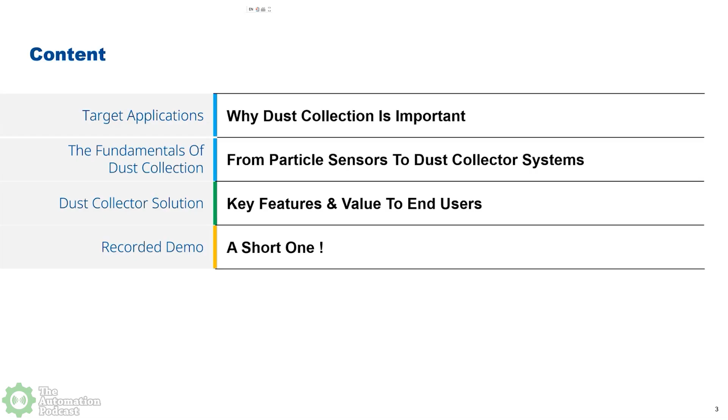And hopefully we'll have time as well to have a short recorded demo that brings us the full scope of how the operators look into that solution when they use it.

In terms of key applications, industries, use cases, dust collectors are essential for many industries that produce dust, produce any kind of powder, any kind of fume, and typically air pollution control, powder processing, handling, industrial dust and fume ventilation are covered one way or another by dust collectors.

And the industries that I put in bold, these are the dirty ones in the sense that they produce a lot of particles, either in terms of gases or dust. Therefore, the regulations in these industries are quite strong. So cement, metals, chemical, plastic, carbon black and toner, lead battery assembly, disassembly, metal foundry.

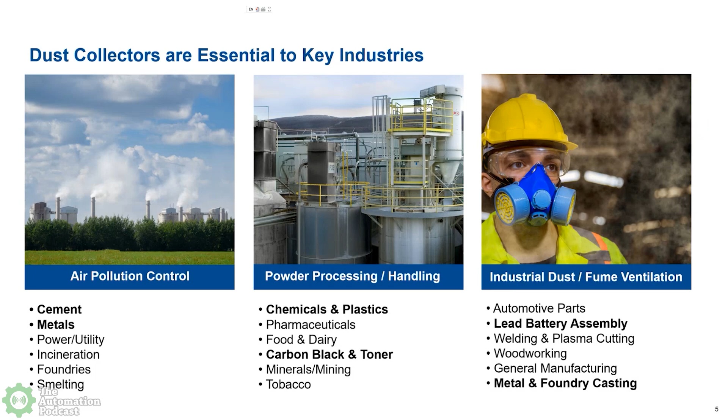And what is interesting is either you produce a waste that you have to manage properly, or it can also be recycled, for example, in industries like plastics, food or wood. All the collected dust that you have, you can also reuse and sometimes recycle.

But why? Why is this important? Why is it important to extract dust from these industries? Let's start on the right side, because this is what the customer is looking for. Because the costs of pollution, the hazards, the safety accidents that can be caused by these kinds of harmful airborne particles and fumes are so substantial, then of course it is very much regulated in all these industries.

And if you calculate the costs on public health, sometimes big accidents in plants, even big fires or hazards to people operating the plant, we talk about billions per year, the cost of that.

And one of the consequences of having such issues is when the dust extraction system is not working properly, or you really have a downtime. For example, I'm going to explain that this really depends on components that are used so often that they wear down, like filters, like pulse valves.

And each time that we have a downtime, it's not the cost of the dust collector downtime that's important, it's the overall downtime costs that it imposes on the operation of the plant, because in order to be conformant, they have to stop operating until they fix the issue. And these downtimes, of course, vary in many ways, in different aspects. How complex is this dust collector?

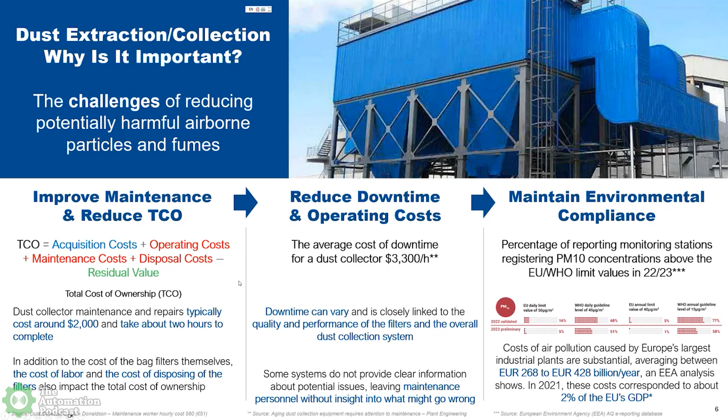And the reason for that is because the damage and the result of a big, let's say, issue on the plant regarding this dust part is quite heavy. So therefore, we talk about 100Ks or even more in some industries like primary metal and chemical, where one single incident is about 100K on average or more.

And then, of course, to avoid that and to be completely compliant, you have to operate those systems in many cases 24/7. And therefore, any way possible to reduce downtime, and as a plus, reduce the energy costs, because for compressed air you have to use electricity, then it pays off, because you're going to be full-time compliant.

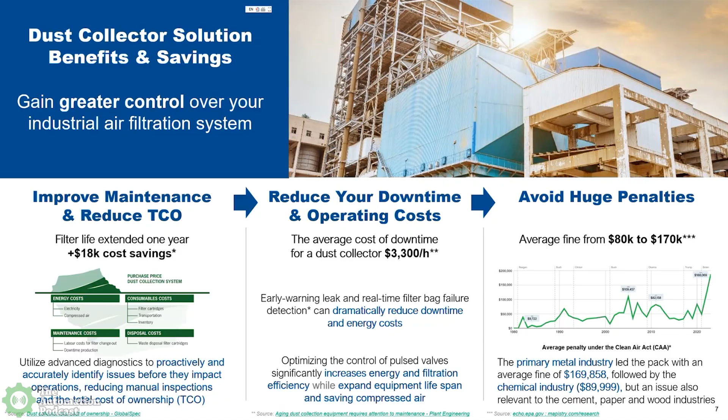You have the filter bags. You have to keep parts in your inventory. You have to dispose of that. And of course, you have the downtime costs and also the labor costs. Now I'm going to just give a chance to say, okay, tell me how a dust collector system works. And these are going to be general principles and basics.

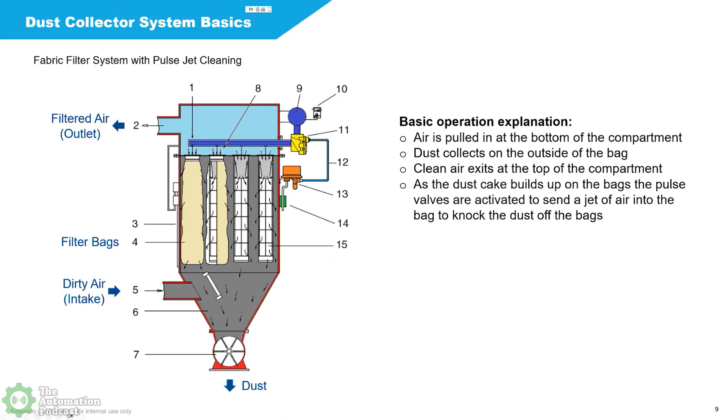And the pulse-jet cleaning is a way to unclog or to clean the filters in order to bring them to the more efficient operation. Especially if you have lots of dust, you need an automatic way to continue to clean it and get it off of the filter and into the bin. So yeah, that makes a lot of sense.

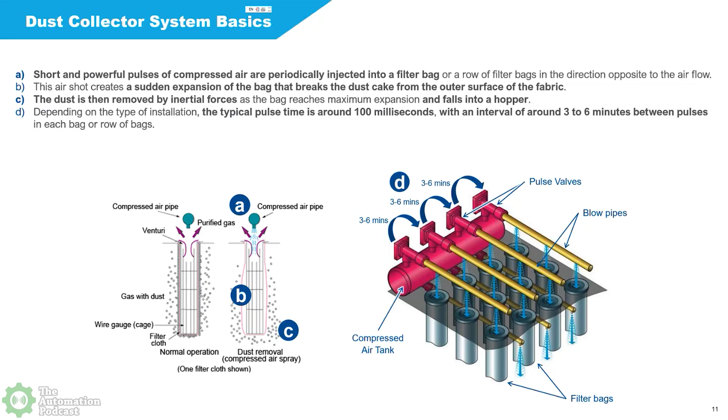In other cases, although you're talking about dust, of course, it could be any kind of powder. Like, for example, in the food and beverage industry, let's say dry milk production. You don't want that dust to be floating around because it can bring contamination. But believe it or not, it can ignite a fire sometimes. So that's why it's important to get that completely eliminated.

Basically, this sensor is coated with PTFE or a Teflon layer, so it's completely electrically isolated from the media. And then when the dust starts touching that probe, a DC charge is transferred. But because this sensor probe is completely isolated with a Teflon layer, the electric charge is in the order of a picoamp, so 10 to the minus 12. And the resolution is about 0.5 picoamp.

So therefore, if the particles are touching, depending on their size, they are going to generate more or less electricity that's going to be transferred. And the ones that are just around, not touching, for example, imagine that this air exhaust duct is quite big, half a meter, maximum 1 meter around that sensor, the particles also generate induced charge in AC. And by measuring that, we have an idea about how clean the air that's getting out is.

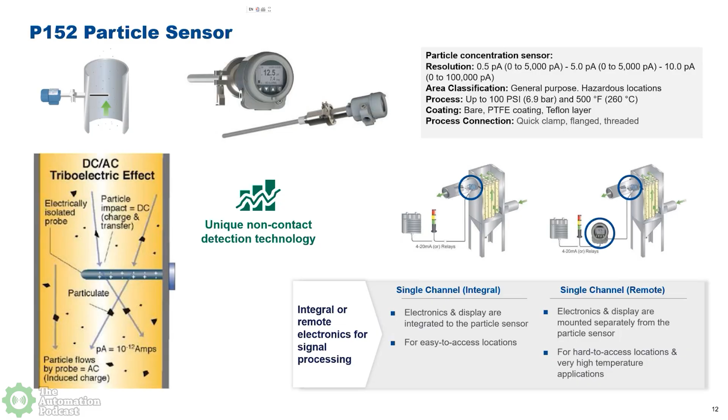They have in nature a little bit of noise, because imagine that every time that you clean, more dust gets inside of the filter bag. It's like when you clean your vacuum cleaner, immediately when you turn it on, some of this dust is gonna get inside, and that's the peak. But now imagine that you have a rupture in the filter, or you have a big hole, because unfortunately things wear out. And then this peak starts getting higher and higher.

So therefore, when we put that solution in place, for a little time, let's say a couple of days, we need to set up these thresholds. We need to figure out the level of noise, because it depends very much on the capacity and the types of dust. But once you do that, in our solution, we set the thresholds like a warning alarm,

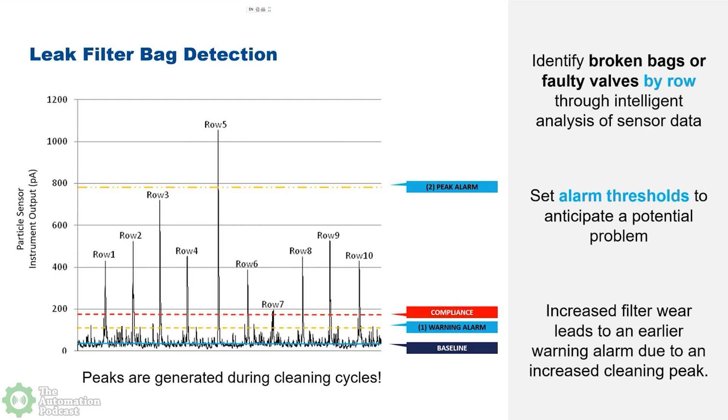And just to remember, with this particle sensor we simply use one unit on the outlet. That's why I needed to serialize the pulses, because I need to synchronize with the pulse jets of every row, row 1, 2, up to 10. And I think, too, if you tried to do them all at once, you would need a lot higher pressure. So it makes sense to do it row by row because it reduces your maximum pressure required. Yeah, with this particle sensor you would not be able to identify which of the rows had the issue. That's why we still have to do that.

But now let's give a solution overview. I think some of the key capabilities and features are going to highlight even more the other diagnostic capabilities that we are able to provide in order to identify such issues correctly and as early as possible. So this is a typical dust collector system.

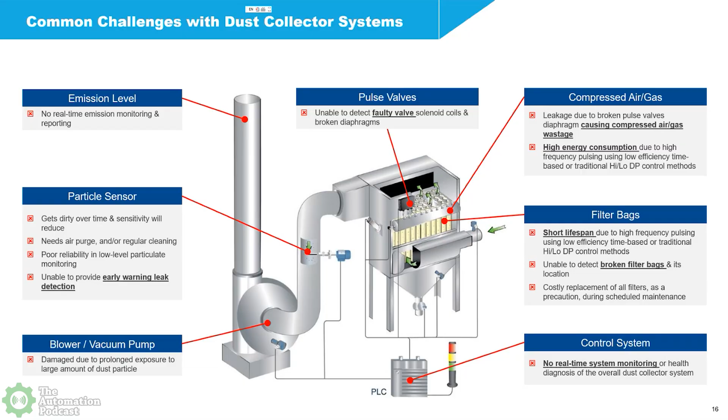The filter bags, independent of the materials, because if you talk about life sciences, food, chemical, or metal, they have different materials, they have a different wear-out lifetime span. The point is, the filter itself might not be so expensive, but going up there, exchanging, stopping, moving things around, getting the dust out before you change, putting on all the personal protection equipment may take hours. So that is the cost of that. And if you're not able to prevent or even have an early warning when that is going to occur, it's going to be a reactive maintenance issue, right? So that's why it's worth looking into different aspects.

And that's why on the left side, when we talk about solutions, we talk about the connectivity part, that we have to work with devices that are HART or 4 to 20 milliamps. Some of the devices are Modbus TCP, newer actuators and pulse valves could be MQTT or even OPC-UA. That's the PLC part that we have, and we can work with pneumatic systems, for example, with EtherNet/IP, PROFINET, or any other standard. Then, of course, we have the IOs that we have to look at to control the pulse-jet systems, but also to monitor the differential pressures, to measure the compressed air in some cases,

until the part where at the top we put an HMI SCADA software platform that we pre-engineered in order to make the development of that solution simpler for our OEMs, or in many cases directly for our end users. And all on the right are the elements that we offer in our portfolio. In some cases, OEMs of dust collector systems just take from us, and they might have their own solution as well.

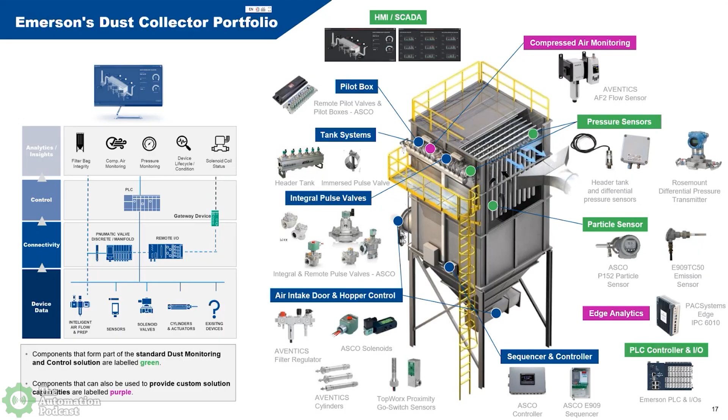No, thanks for highlighting. And I say that when I introduce myself, that I'm from the discrete automation part of Emerson, because most people would know Emerson by Rosemount, for example, pressure, Fisher valves, and the DeltaV DCS, right? Yeah, this is the discrete automation part, and that's why it's probably something new for everybody here.

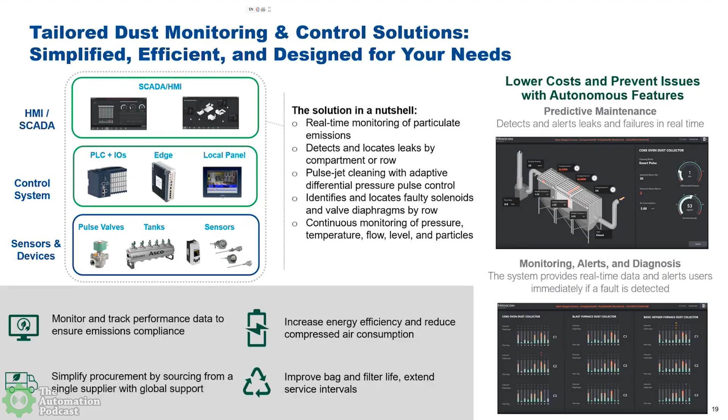And basically, when we install that solution, sometimes our customers ask us to also integrate with their control systems. So therefore, the compressed air generation, the fan, the hoppers, the safety alarms of the plant sometimes are fully integrated as well. Now let's talk about a few features because these are the ones that probably you haven't seen yet. I want to talk about our HMI control system.

It's based on the Movicon Next platform, and basically it provides everything that you know from the SCADA HMI, and that's why we use this in general for applications like OEE, energy management, and infrastructure monitoring like smart cities, wastewater facilities, solar mega plants, etc. Of course, it provides data visualization, but I like to highlight that we provide connectivity to all major PLCs that you can imagine with communication drivers. Of course, the open standards like OPC UA, like Modbus.

And on the lower part, the gray part here is what we used for that solution. Sometimes we use geomaps to indicate where the filters are. Some georeferences, let's say geofences as well. The people have to be with personal protection equipment to be there. So there is some real-time data that, of course, we are collecting for the particle emissions and other elements like differential pressure or header pressure. And then you have the headlines.

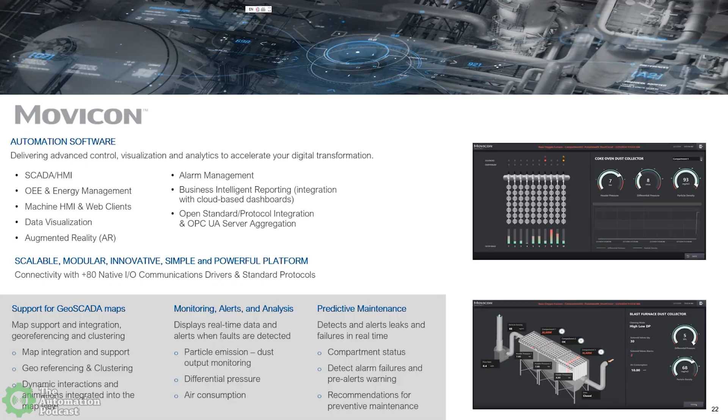You can see some screens that are completely dedicated to alarms and alerts. And these diagnostics that you see are related to the solenoid, to the filter bag, and to the diaphragm diagnostics. A lot of them are diagnosed in different ways. For example, the solenoids, we look into the power output of our I/O cards to see if the valve pulse, the solenoid is open or complete short circuit. The filter bag, I already explained it. We detect with some logic with the particle sensors.

And the diaphragm diagnostics is based on the header pressure, because if this diaphragm is completely open, the differential pressure within the chamber starts fluctuating, and then you know that there's something wrong there. But all of them increase the filtration efficiency, change from reactive to predictive maintenance. Of course, keep the site compliant, minimize dust emissions, and for sure increase equipment lifetime, like the filter units, and reduce the compressed air usage.

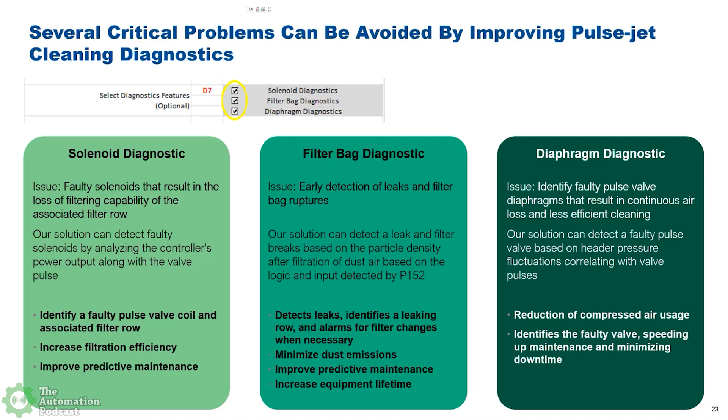If you sum up all of that, the return on investment might be quite fast. Of course, for large installations, it might be within 2 years, but it's still a very fast return on investment for that particular solution. That's what it looks like. A little bit, let's say, zoom in. You see that they're not nice looking, but they indicate graphically where the issues are, the number of issues.

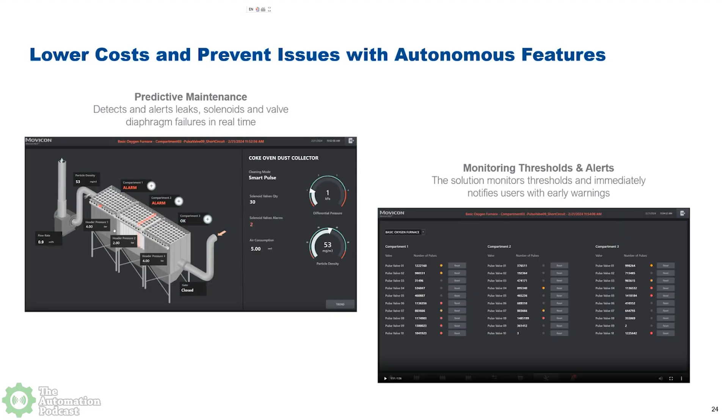On this screen about thresholds and alerts, the second one on the right side is the number of cycles. Imagine that every pulse valve would have about a couple of millions of cycles of lifetime. Here you can at least predict how many spare parts you need to have in the next quarter. The red signals mean it's gone, it's faulty, and the yellow ones are the ones you need to watch because they're getting closer to the end of lifetime.

The other aspect is, like I said, when you acquire dust collector systems without a solution, it comes with this sequence box, which basically is time-based pulsing. So it keeps pulsing every 3 to 6 minutes, like I said, 100 milliseconds, but it can change. It's fixed. That leads to excessive use of the pulse valve, so it's going to wear out sooner than it should, but it also reduces the bag life because of stretching the bag filters, and you waste much more compressed air than you should.

That's why we implemented these other two types of pulse-jet cleaning methodologies. One is on demand. That really depends on the differential pressure between the chambers, and you can set in the solution how these multiple filter lines operate normally. This differential pressure threshold can be, for example, when the efficiency is getting bad, and if that is within a certain band, you can estimate that there is accumulation of the dust cake.

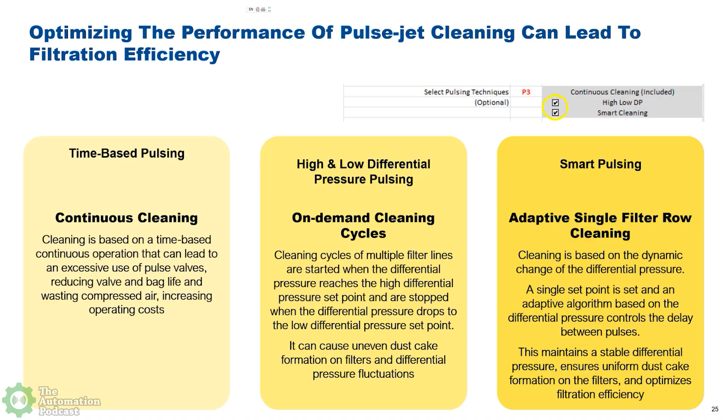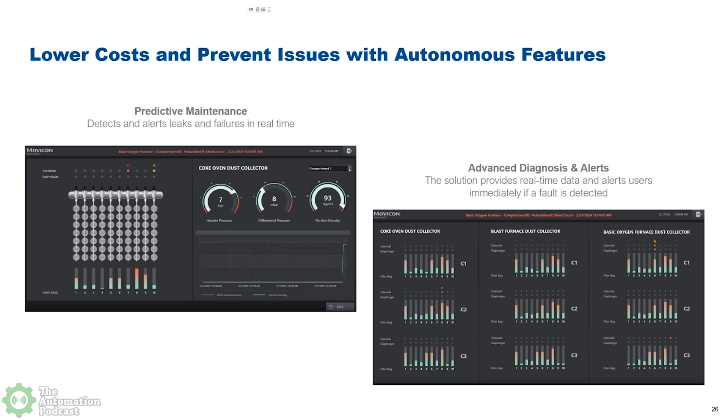And on the far right side, if you have more than one dust collector, you can create different screens if you want. The idea here is that C1, C2 means compartment 1, 2, 3. Again, the diagnostics lead to preventative, predictive maintenance and avoid completely reactive maintenance.

Interestingly, if you don't know, in order to replace a single filter, to check if a solenoid valve is short-circuited, or to see if a diaphragm valve is open, you need to get there in personal protection equipment, using mask, gloves. You need to go up. You need to get to know where these things are.

And imagine if you could avoid that and just look at the screen and say, hey, I know that this is compartment 1 of filter A, and I know where I need to look. And by the way, I have the spare part because I had early indications to fix it. So then we are not just talking about reduction of time, but reduction of costs, and avoiding putting people every time in such an environment. Okay?

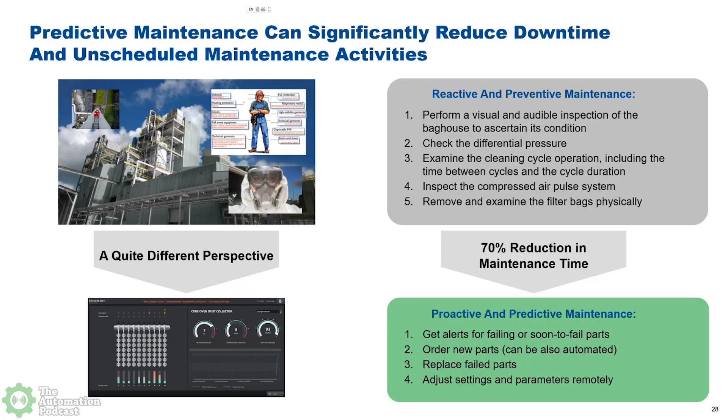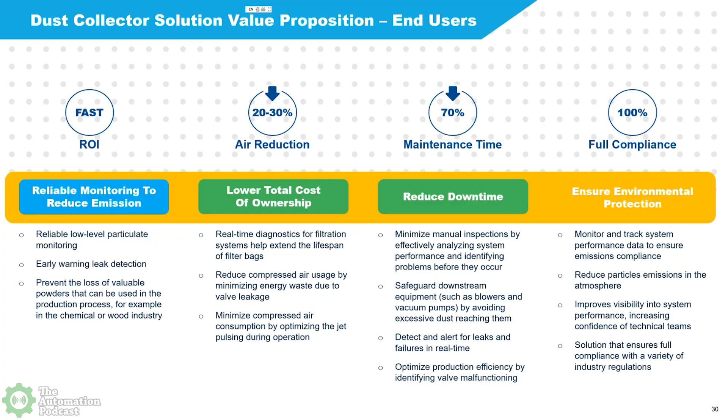And finally, of course, customers do this because they want full compliance. Every possible issue can be tracked and reported. The efficiency of the systems can be shown in audit-ready reports. You can really prove that you are reducing particle emissions. You provide a lot of visibility into what's going on. So the technical teams have very high confidence to operate the system, because without it, they are operating blindly, and that's why they often feel concerned that bad things might just happen.

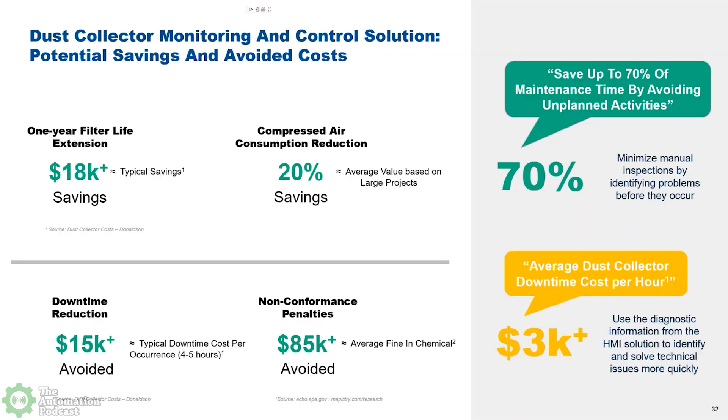So, Sean, if I have time, 3 minutes, I'm going to run this HMI demo, because then you can see on the screen how the different screens are operated. But it's up to you. Yeah, go ahead. Okay, so this is an HMI demo, simulated of course, because it's not possible to connect live or to have all this equipment. So then I'm going to click here.

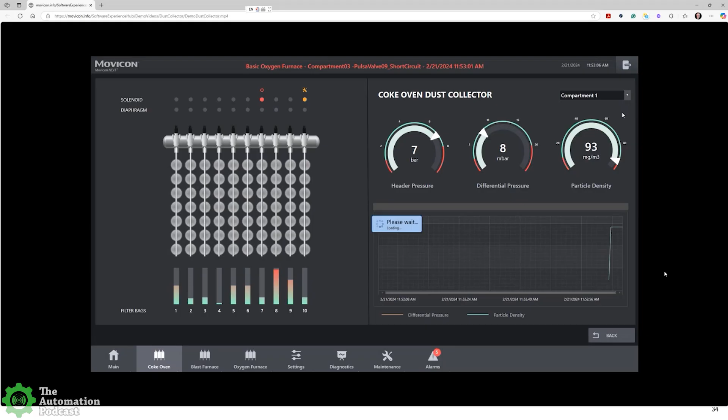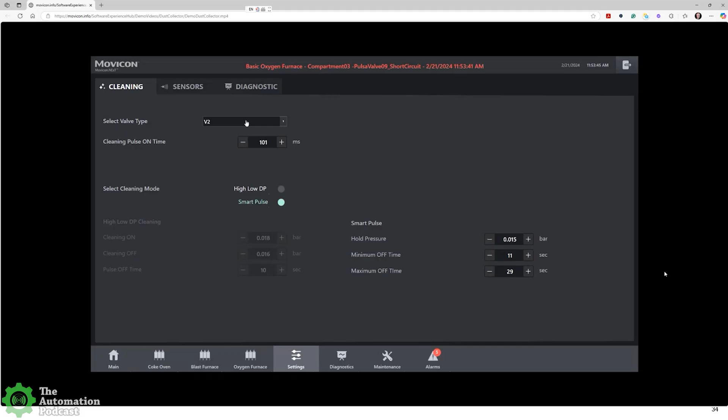So basically you see how an operator would navigate and the type of information that is provided. I'm clicking through very quickly because we don't have much time, but you see that you are able to trend the particle density and the air consumption. You can set the alarms, you can indicate which pulse valve is not okay, the level of the filter bags, and now the settings, the cleaning. These are the parameters you can adjust. Like I said, we have an adaptive learning algorithm, but in many cases you need to at least set it up. The sensors as well, their sensitivity. There are many different thresholds.

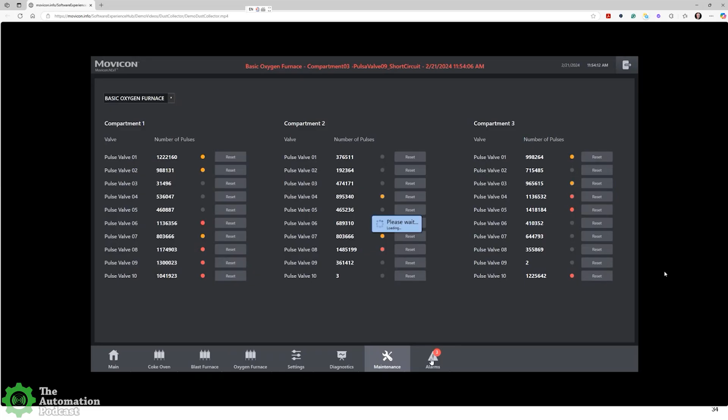And then the diagnostic part for the diaphragm and the rupture, where you can detect them. And once this is done, you can see that you have quite interesting information. For example, if you change the valve, you reset the counter. These are the alarms that you can acknowledge, etc. Okay? And that's it.

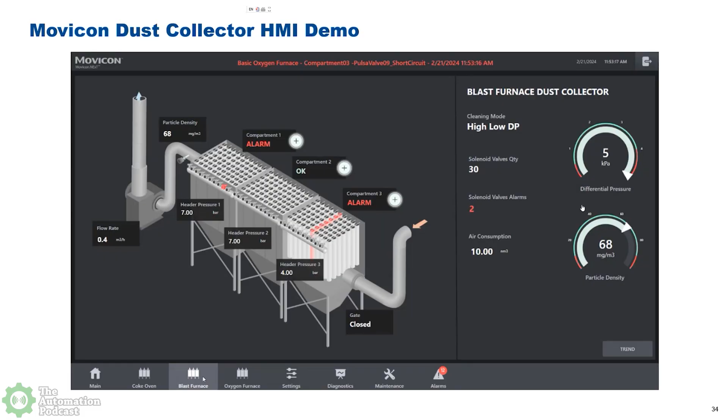Yeah, that gives you a good idea of what you're getting as far as the HMI is concerned, and it's good to see a full screen. I mean, it looks like a very well designed HMI. From my perspective, it looks like it's really focusing in on any errors.

So you have just standard graphics, very good looking graphics, and then if there's an error, you see it in red or yellow. Really calls the eye to it.